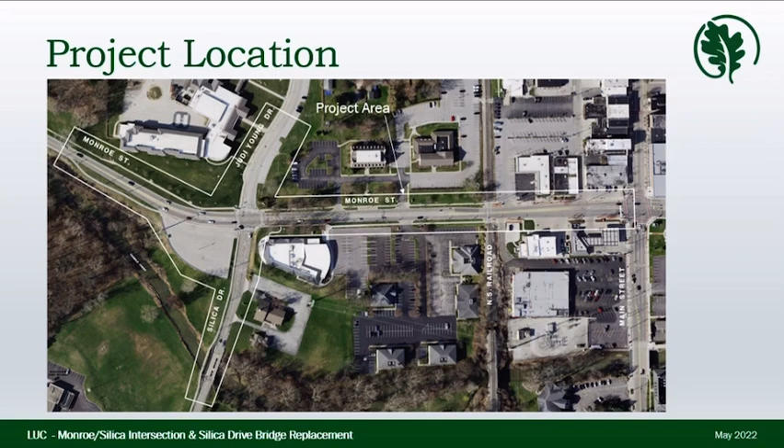The project limits are shown in the white boundary on this slide. On Monroe Street, the westerly project limits are at the Maplewood Elementary property line and continue to the east to Main Street. On Silica Drive, the southerly project limits are just south of the existing bridge to Monroe Street. On Judi Young Lane, the northerly project limits are approximately halfway to Maplewood Avenue to Monroe Street.

In 2017, the city studied the Monroe and Silica intersection for ways to reduce congestion and improve level of service. Level of service is a qualitative measure of performance that factors in speed, density, congestion, and other factors, and assigns an overall grade, with an A being the best and an F being the worst. The AM commute, and in particular this overlap with the Northview High School arrival, functions at a poor level of service with an overall grade of an F.

If you are a frequent AM user of this intersection, it is not uncommon to see traffic queuing in the eastbound direction as far back as Erie Street. The study showed that congestion and level of service could be improved by implementing a roundabout or widening the intersection with additional turning lanes. The study also indicated that an additional second eastbound lane from Maplewood Elementary to Main Street was necessary. The city conducted a public involvement campaign in 2019 requesting feedback on each alternative, and the overwhelming support was for a traffic signal improvement over a roundabout.

At the same time as the intersection public involvement was occurring in 2019, the city was notified by the Ohio Department of Transportation that a recent inspection of the vehicular Silica Drive Bridge over Tenmile Creek revealed that the general appraisal value fell from a 5 to a 4. General appraisal is a composite measurement of major structural items on a bridge and an indicator of overall health and condition. This is the minimum value for a bridge to qualify as a candidate for federal funding assistance. The city applied for federal funding in 2020 and was successful.

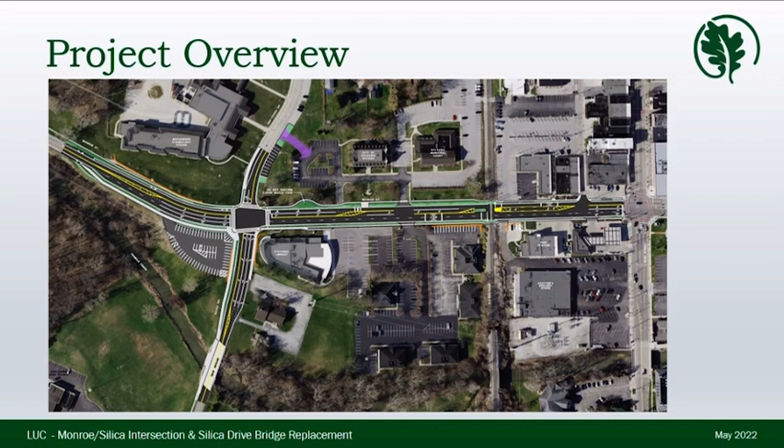The replacement plan calls for removing both the vehicular and pedestrian bridges and replacing them with one joint use structure capable of conveying both modes of traffic. The overall proposed improvements, including lane assignments and links, have been overlaid over an aerial photo of the project area and are shown on this slide. We will discuss and highlight the improvements in more detail on the next few slides.

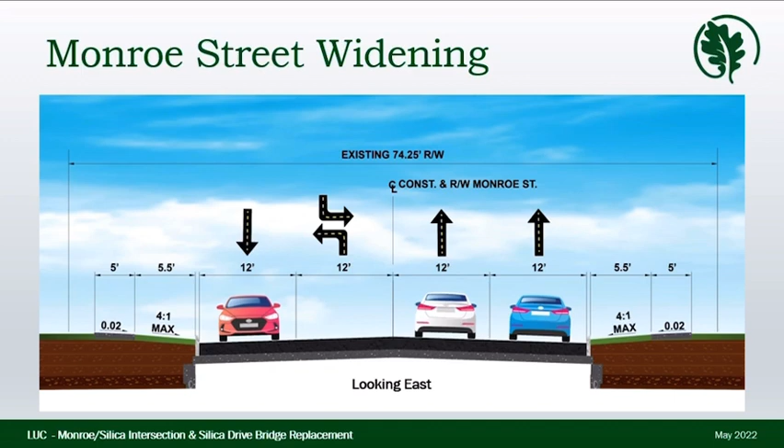This slide shows typical lane assignments on Monroe Street facing east between Silica Drive and Main Street. There are two eastbound lanes, one westbound lane, and one dedicated left turn lane or two-way left turn lane in the middle. This slide shows a closer view of the west leg of the project in the Monroe and Silica intersection. Eastbound Monroe will be widened from 2 lanes to 3 lanes on the intersection approach and will be provided with one left turn lane, one dedicated through lane, and one combination through right lane. On the east side of the intersection, there will be 2 dedicated through lanes to Main Street.

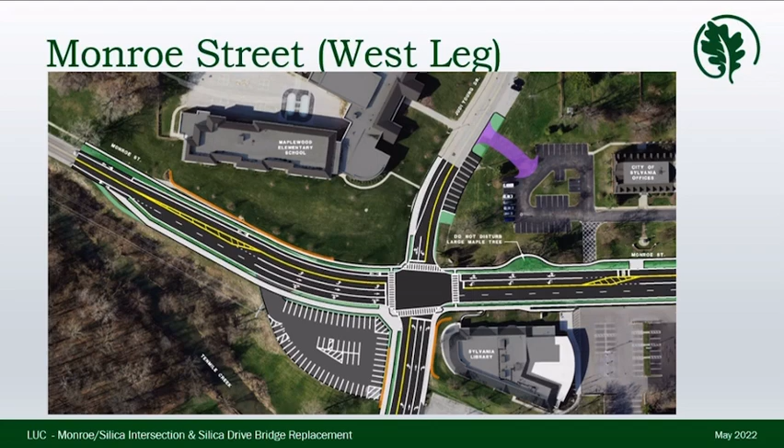Northbound Silica will be widened from 2 lanes to 3 lanes on the intersection approach and will be provided with one left turn lane, one dedicated through lane, and one dedicated right turn lane. The westbound and southbound approaches will shift slightly, but the number of lanes and assignments will remain unchanged. This slide shows a closer view of the east leg of the project up to Main Street. Again, there will be 2 eastbound lanes, one westbound lane, and one dedicated left turn lane or two-way left turn lane in the middle. The railroad warning devices and flashers will be replaced and the crossing widened.

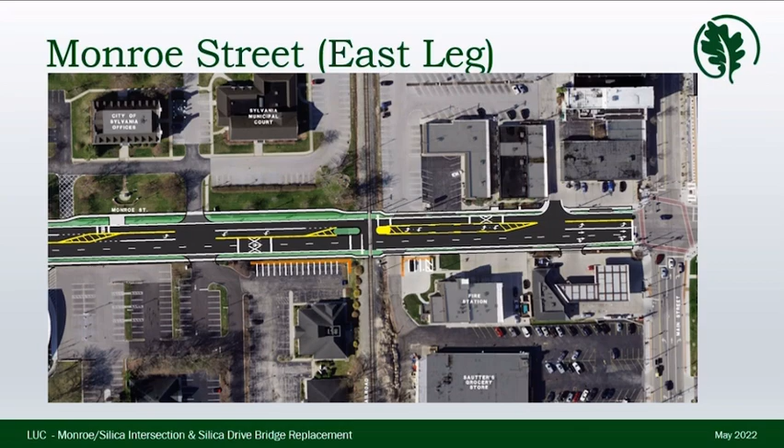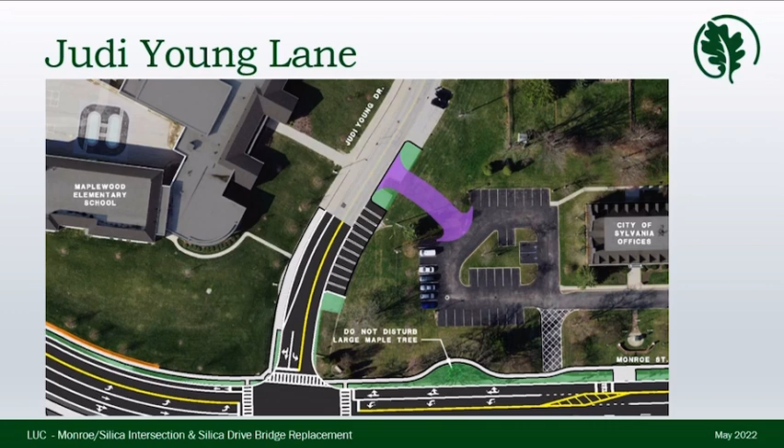This slide shows a closer view of Judi Young Lane. A new driveway will be installed connecting Judi Young to the City Hall parking lot, shown in purple shading on this slide. The existing driveway and access to Monroe Street from the City Hall parking lot, shown in white crosshatching, will be removed. This slide shows a closer view of Silica Drive.

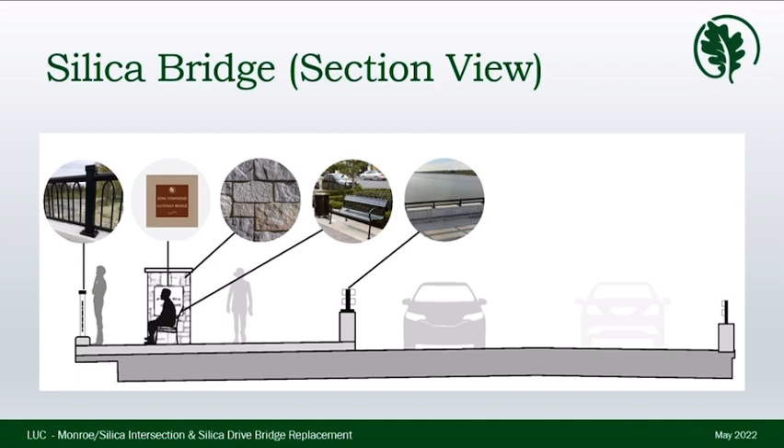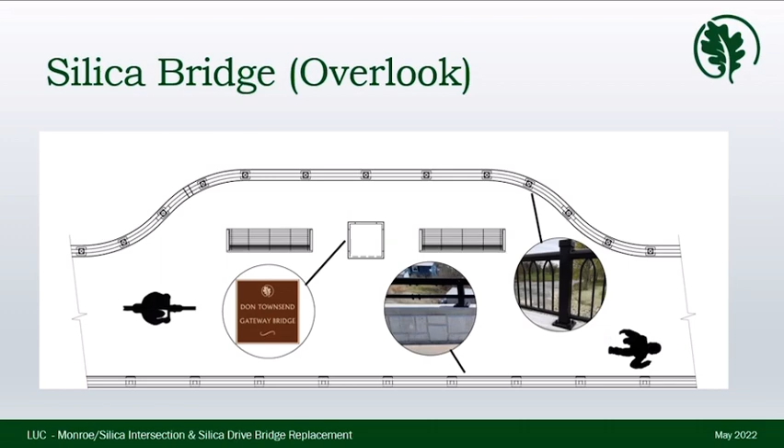The west side of the bridge will include an overlook area, widened beyond the multi-use path, and will include 2 benches for seating. In 2018, City Council officially dedicated the Silica Drive Bridge the Don Townsend Gateway Bridge. Mr. Townsend was an art teacher at Northview and recognized for his years of service and inspiration to students. This overlook area will include a decorative concrete pillar with bronze plaques as a memorial to Mr. Townsend.

Construction is scheduled to begin in March 2023 and will be substantially completed by November. Construction will be highlighted by 2 major phases, named Phase 1 and Phase 2. During Phase 1, Monroe Street will be restricted to a 1-way traffic pattern, with the westbound direction remaining open. All eastbound traffic will be detoured around the construction zone. Also under Phase 1, the Silica Drive Bridge will close to all traffic in April 2023 and remain closed for 4 months while it's replaced. Access will be maintained at all times to Anchor Church.

This will impact the Northview High School travel plans for the last 2 months of the 2022-23 school year. However, the bridge will be open to all traffic prior to the start of the 2023-24 school year in August. Once the 2022-23 school year concludes at Maplewood Elementary at the end of May, Judi Young Lane will be closed to all traffic for 2 months in June and July for reconstruction work. However, the roadway will be open to all traffic prior to the start of the 2023-24 school year in August.

Phase 2 construction will begin in early August. Monroe Street will continue in a 1-way traffic pattern, but the direction will switch from westbound to eastbound. All westbound traffic will be detoured around the construction zone. Both Silica Drive and Judi Young Lane will be open to traffic.

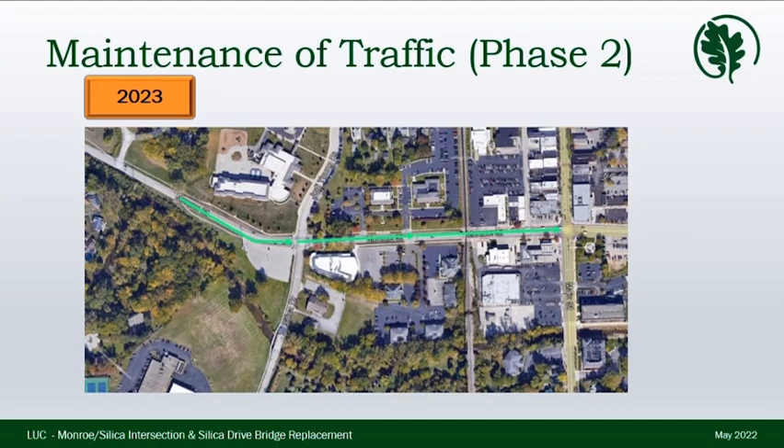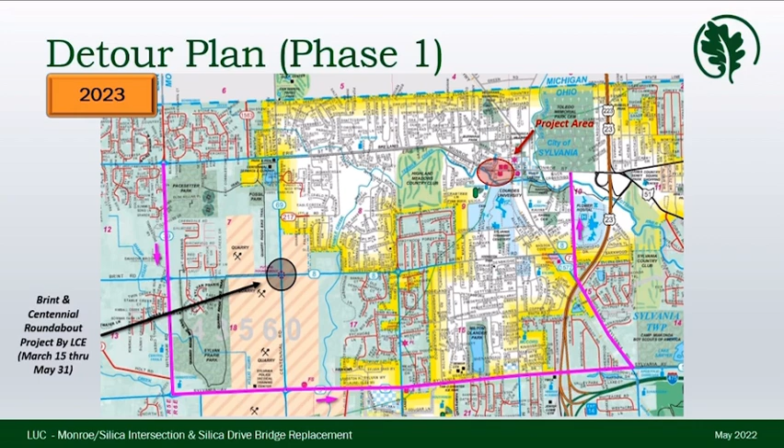The Lucas County Engineers Office will be installing a roundabout at the intersection of Centennial Road and Brint Road from March 15th through May 31st. Within this time frame, the intersection will be closed for 45 days. Once the roundabout project is completed, the Lucas County Engineers Office and City will be performing a joint agency resurfacing project on Brint Road from June 15th through August 1st. The county project limits are from Centennial Road to 10 Mile Creek. The city project limits are from Silica Drive to the railroad tracks just west of Main Street.

Once the Brint Road resurfacing project is completed, the Lucas County Engineers Office will be performing a resurfacing project on Mitchell Road from August 15th through October 31st. The county project limits are between Brint Road and Sylvania Metamora Road. As a result of the work on Mitchell Road, the Phase 2 detour route for the west leg can be slightly reduced in length, and utilize Centennial Road.

Also, once the Brint Road resurfacing project is completed, the city will be performing a sanitary sewer lateral rehabilitation project on Main Street between 10 Mile Creek and Main Street Circle. This project is scheduled to start in the fall of 2023 and be completed in the spring of 2024.

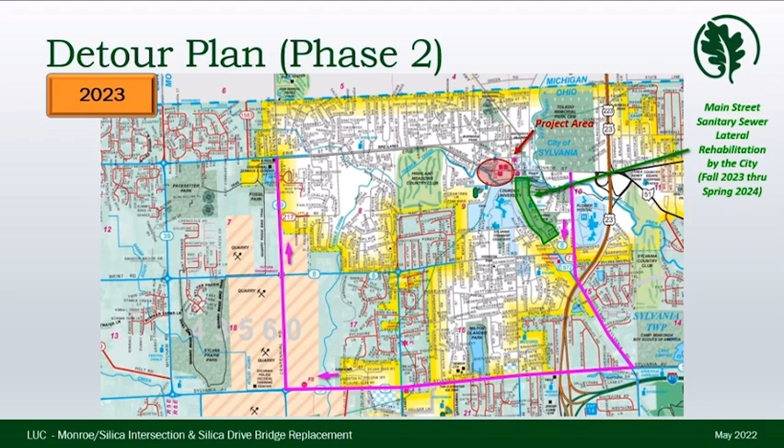As noted previously, the Phase 1 maintenance of traffic pattern, and specifically the Silica Drive bridge closure, will overlap with the last 2 months of school at Northview High School in April and May. As a result, all Northview traffic will need to come from the south of campus using Convent Boulevard. The city and Sylvania schools have developed a travel plan that will manage traffic control and congestion relief during the Northview arrival and dismissal periods.

For the arrival plan, buses will be separated from staff and student traffic prior to Silica Drive by requesting different arrival directions. Buses will arrive from Brint Road using Maple Drive. Staff and students will arrive from Main Street using Convent Boulevard. Sylvania Police will provide traffic control measures at the Silica Convent and Main Convent intersections as needed to better facilitate these traffic movements. We would ask that all staff and students avoid using residential side streets as cut-through streets during this period.

For the dismissal plan, buses will again utilize Maple Drive to Brint Road. Staff and students will use Convent Boulevard to Main Street. Sylvania Police will provide traffic control measures at the Silica Convent and Main Convent intersections as needed to better facilitate these traffic movements. We would ask that all staff and students avoid using residential side streets as cut-through streets during this period.